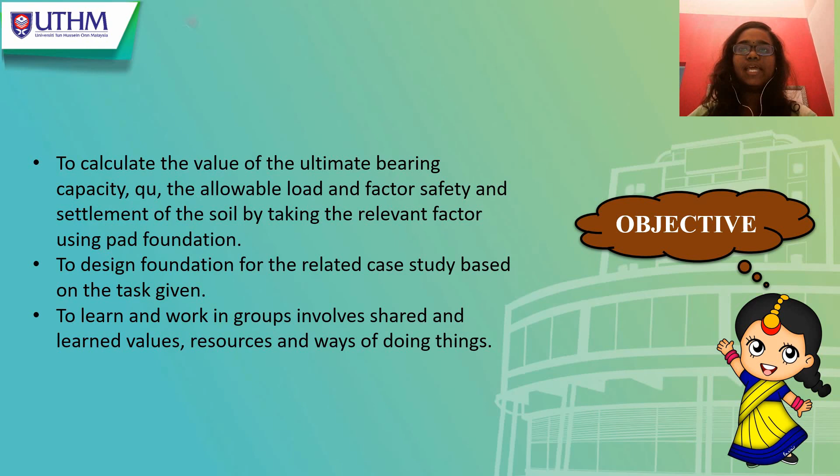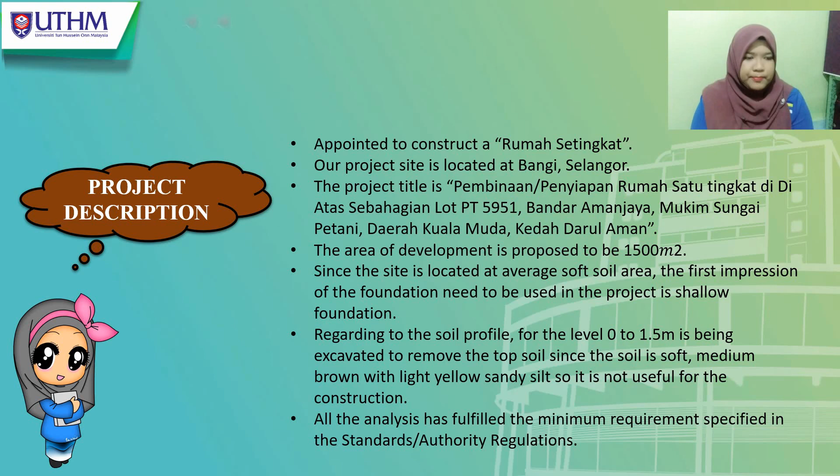Our SI report was carried out from 8 April 2019 until 17th April 2019. In general, the purpose of the soil investigation was to provide the following. First, information to determine the type of foundation required, shallow or deep. Second, information to allow the geotechnical consultant to make a recommendation on the allowable bearing capacity of the soil.

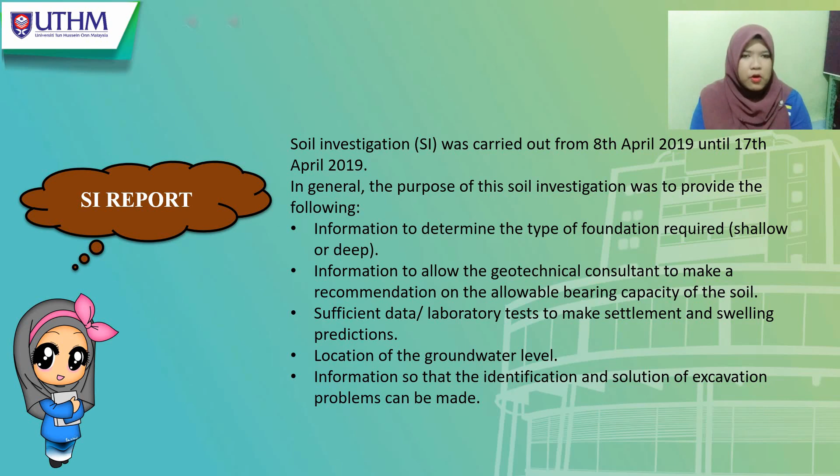Third, sufficient data or laboratory tests to make settlement and swelling prediction. Fourth, location of the groundwater level. The last one, information so that the identification and solution of excavation problems can be made. For the soil sampling, there are two, disturbed sample and undisturbed sample.

For the groundwater table observation, the groundwater level in the borehole was measured while in progress daily at the following times: before commencement of the work in the morning and after finishing work in the evening.

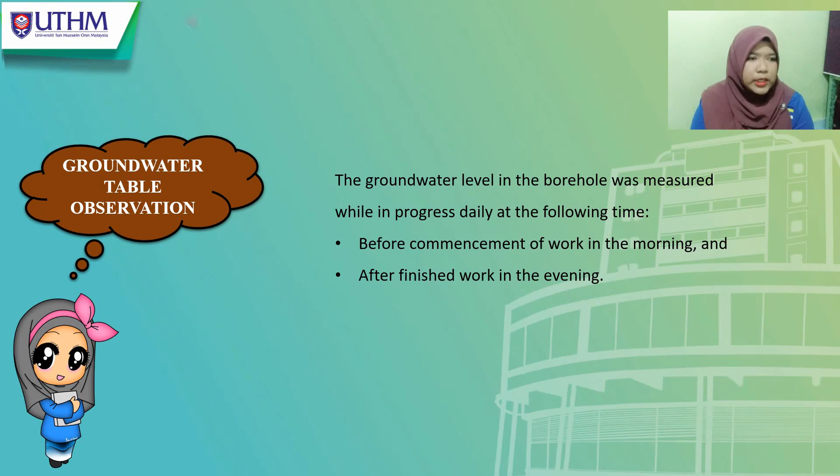For the laboratory test, the following laboratory tests were carried out in accordance with BS standard, code of practice and design manual on selected samples, such as classification test, soil strength test, and unconsolidated undrained strength test.

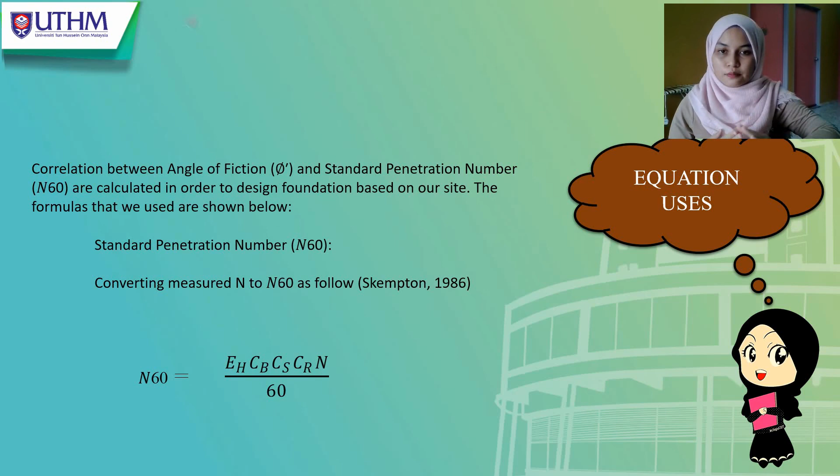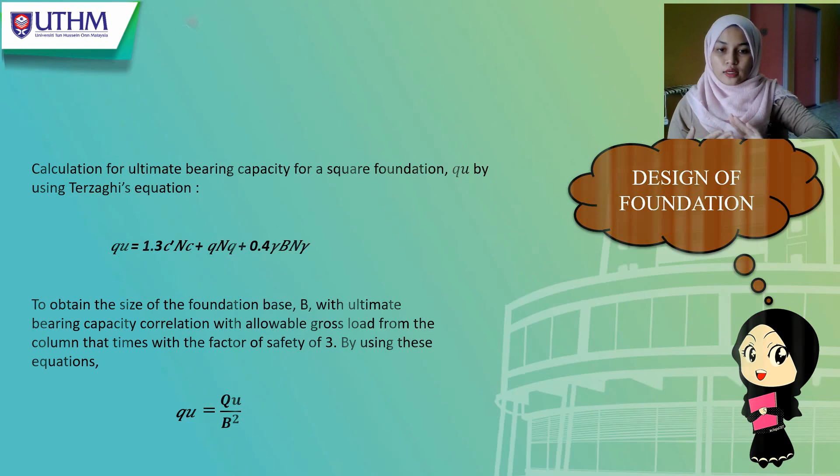To design the foundation, we have used the Terzaghi equation to calculate the ultimate bearing capacity for a square foundation. By using the equation QU equal to Qu over B squared, for square foundation, we can get the size of foundation at every column.

Hello doctor, my name is Kokilavani, matrix number DF170007. Today I am going to explain about the checking of foundation and checking of settlement. We have been given 5 different column loads, which are 200 kN, 500 kN, 750 kN, 1000 kN and 3000 kN. From the column loadings, we have found the width of the pad footings.

Then we need to do the checking for foundation. Here we have to calculate the allowable gross load. The purpose of the allowable gross load is to compare the column loading with it. All of our 5 column loadings are less than the allowable gross load, which means that the loading is bearable for the foundation to support.

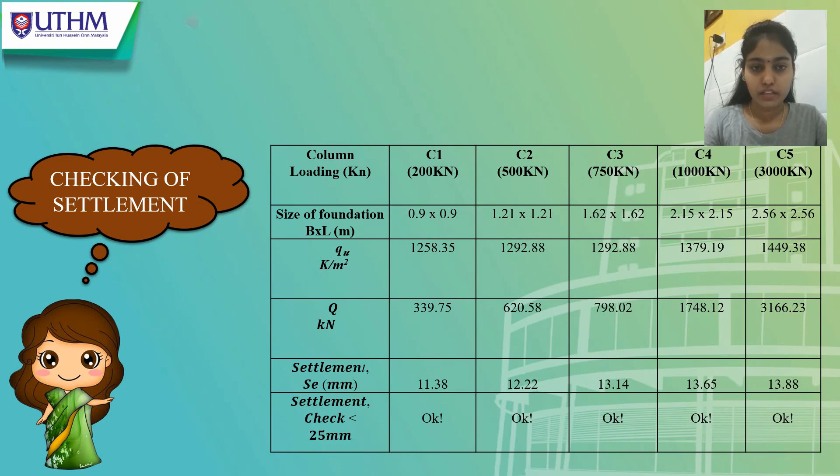Next is checking for settlement. We used the Meyerhof method to do this checking. According to the Meyerhof method rule, 25 mm will be the estimated maximum settlement for a shallow foundation. The highest settlement occurs at our column C5, which is 3000 kN with 13.88 mm settlement. Since it is lower than the estimated maximum settlement, our overall settlement checking was okay.

Okay, I will continue with conclusion or comments. First of all, we can conclude that the soil properties that we obtain from the bore log and the types of soils are suitable to design a shallow foundation. Secondly, the type of soil for this project is mostly silty sand, even though there were two others such as clay and silt. The square pad foundation was used in this project due to depth of foundation being 3 or 4 times the width of foundation.

Thirdly, we propose the pad foundation due to soil properties and the load of the structure. Fourth, pad foundations are used to support an individual point load, such as that due to a structural column.

Next, based on the analysis of structure, we obtain 5 groups of loading for column, which are 339.75 kN, 620.58 kN, 798.02 kN, 1748.12 kN, and 3166.23 kN. All of this loading is lower than Q allowable.